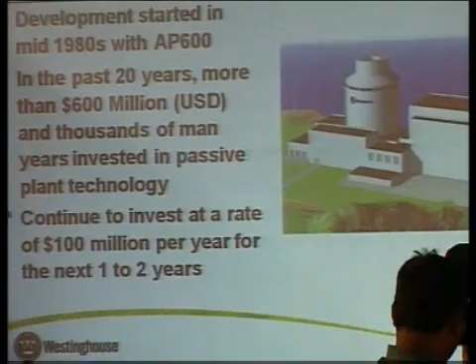Just a few comments on AP1000 technology. AP1000 has been in development for about 25 years. We started in the mid-1980s developing the AP600, predecessor to AP1000. About 600 megawatt plant. AP1000 actually is around 1,100 megawatt plant. But I credit the engineers and scientists with the foresight 25 years ago to look at passive technology. And it's to their credit that I think we are where we are today with the AP1000.

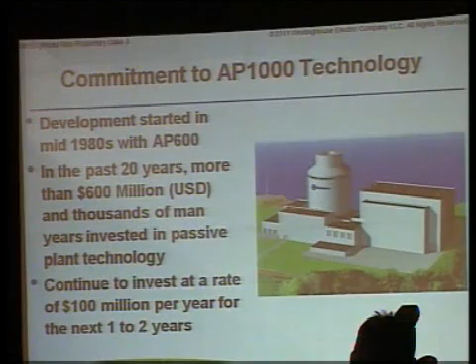Considerable investment, 25 years, and we often say that we've invested hundreds of millions of dollars to prove that gravity works, and it still works. Mr. Isaac Newton was correct, gravity does work, and we proved that, but it's taken hundreds of millions of dollars to prove that.

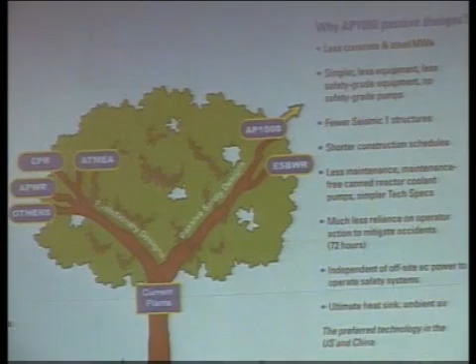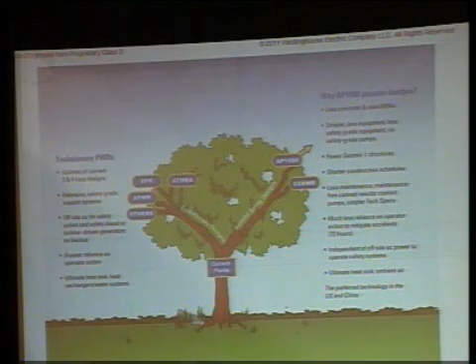As we look at the evolution of nuclear power, there's several different ways to achieve increased levels of safety. When we talk about safer plants, we typically talk about increased levels of safety. And if you look at this tree, there's two branches. One way to achieve those levels of safety is by adding active systems, more redundant systems, additional trains, additional pumps and valves. We can achieve those levels of safety and redundancy by adding those active systems. The other way, the right-hand branch, is the passive way. AP1000, General Electric's ESBWR, we heard about the advanced pressurized heavy water reactor and its passive features.

So that's the other branch of how we achieve those levels of safety. And we believe that passive is the right way because it's simpler, has fewer safety grade pieces of equipment, and less stress on the operator. And the ultimate heat sink is ambient air, the atmosphere.

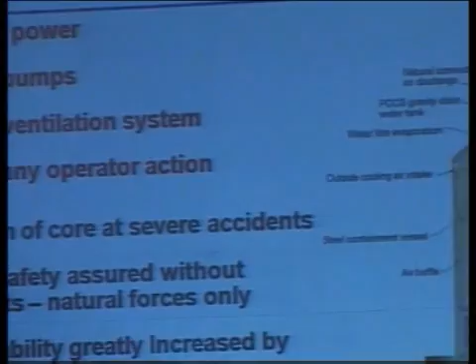So if we look at the AP1000, some of the key safety features, top of the list is no reliance on AC power. And if we look at the events at Fukushima in March of this year, not having to rely on AC power is a significant benefit for reactor design and safety systems. No safety-related pumps, so there are no pumps that need to activate in the event of a loss of power, station blackout. 72 hours without operator action, so there's much less stress on the operators in an emergency event.

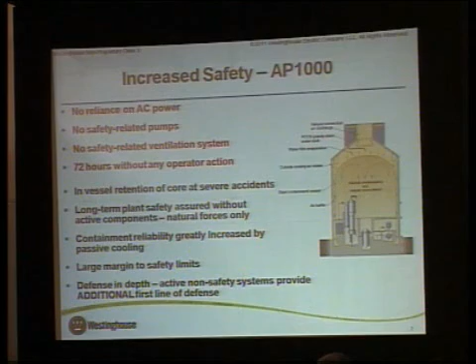Now, I must add that there are active systems in the AP1000 design. Those are non-safety-related active systems, and the operator has the ability to activate those active systems to mitigate the event. The passive systems only come into play if those non-safety related active systems are not available, such as in the instance of a station blackout. But the first line of defense is always to utilize the systems that are available to the operator. If those fail, the passive systems kick in.

In-vessel for severe accidents, we utilize in-vessel retention. I'm not going to talk about that today, but our system is to use in-vessel retention to prevent the escape of a core from the reactor vessel.

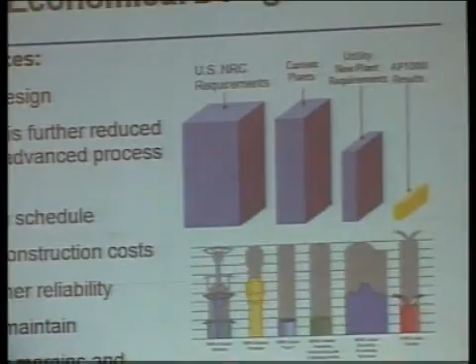So if we look at what passive safety features can drive, particularly the lower right-hand side, those compare the various quantities of material of a typical Generation 2 reactor to a passive system. Significantly fewer safety-related pumps, significantly fewer safety-related valves, significantly less cable, significantly less concrete, and particularly significantly less seismic building volume. The seismic building volume is a significant driver to construction time and construction cost.

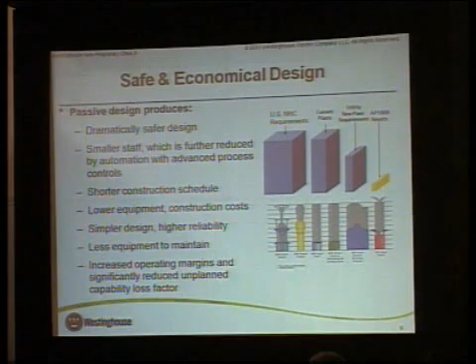As I mentioned before, looking at the last bullet, the operating margins, we have significantly increased operating margins. Accidents are mitigated through the use of active systems that are available, and the passive systems only come into play if and when those active systems are not available.

Again, we have a saying that size does matter. If we look at the picture on the left, we compare a traditional Generation 2 reactor. This happens to be Sizewell, which is a Westinghouse 4-loop plant in the United Kingdom. If we look at the footprint, the safety-related systems in color, and compare that to the footprint of an AP1000 on the right, you can see the significant difference.

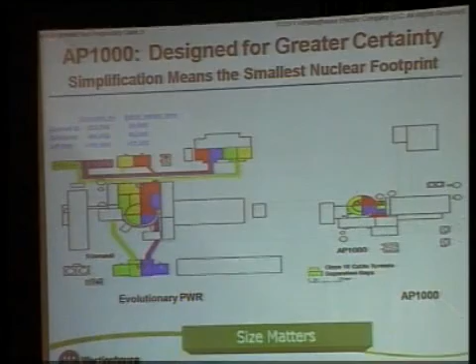When we have visitors come to our construction sites in China, they're amazed by the size - the smallness of the AP1000, the smallness of the footprint compared to a traditional, typical 4-loop or even 3-loop reactor.

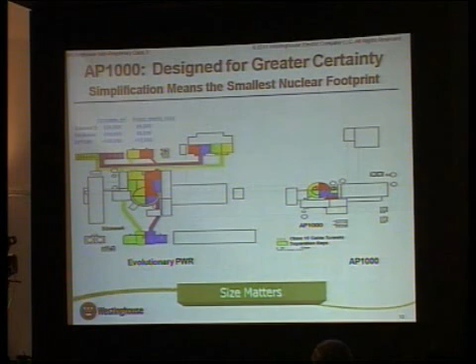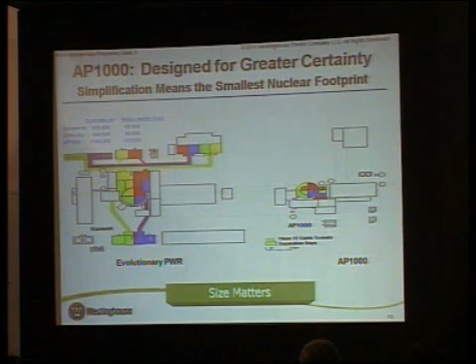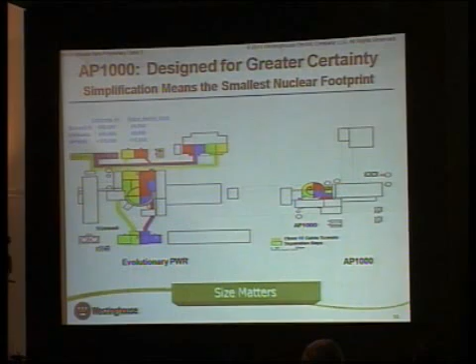So if we look at some statistics, an AP1000 compared to a Sizewell plant uses about a fifth of the concrete and about a fifth or a sixth of the reinforcement bar. Less concrete, less rebar means less cost, and even more significantly than less cost, means more schedule predictability and shorter schedule time. In nuclear, with very large capital costs, construction time is paramount, and the ability to control and assure construction time is paramount to keep the costs within reason.

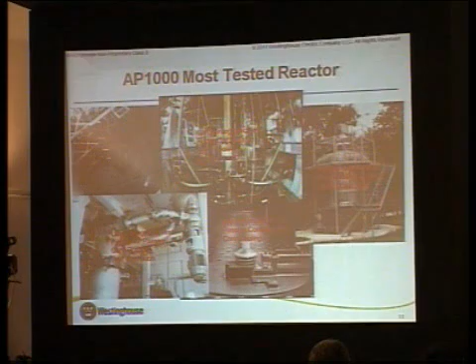I mentioned before testing. Since the mid-80s, the AP600 and the AP1000, the AP600 being the predecessor, has been extensively tested. These are just some of the pictures of the testing that we've done in the United States and around the world to prove the various passive systems work. Again, we proved that the gravity indeed does work through extensive testing.

A very current event, station blackout. Of course, what happened at Fukushima was a station blackout event. The AP1000, even starting 25 years ago, took that into consideration. So in the event of a station blackout, the reactor is maintained in a safe shutdown condition for 72 hours with absolutely no operator action, no on-site, no off-site AC power - no AC power is required whatsoever in the first 72 hours to maintain the reactor in a safe shutdown condition.

And after, from 72 hours to 7 days, we would use other sources of water on site, and after 7 days, additional sources of power and water would be implemented to maintain long-term safe conditions and cooling.

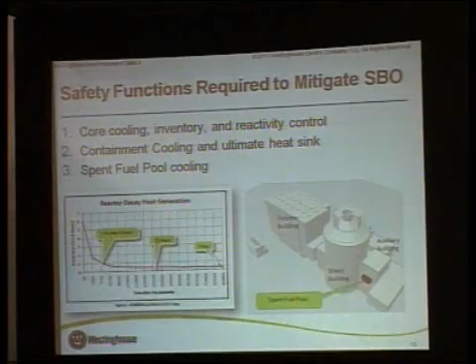Again, looking at station blackout, which is very relevant to today's safety environment, 3 things you need to do to mitigate a station blackout. One is core cooling - you need to cool the core. You need inventory to cool the core, and you need to control reactivity. The chart below just shows the decay heat, and it's particularly important to maintain that cooling in the early stages of the event because the decay heat is high and obviously tails off as time goes on.

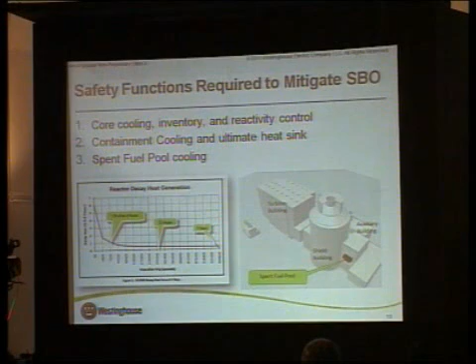The other thing is containment cooling. You have to get the heat out of containment to the ultimate heat sink, which in the case of the AP1000 is the atmosphere. And then lastly, spent fuel cooling. As we saw in Fukushima, you can't ignore the spent fuel pool - you must maintain cooling of the spent fuel pool at all times.

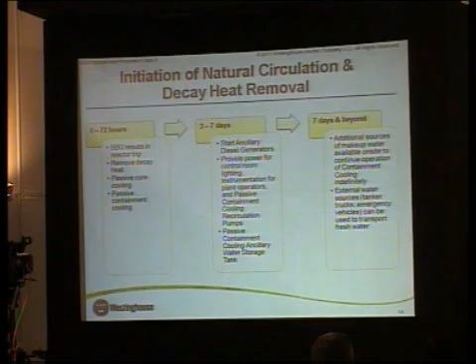So if we look at the scenario of the station blackout, 0 to 72 hours, you have a reactor trip because of station blackout. I have some animations coming up that will demonstrate some of these features, but you need to remove the decay heat, and we do that passively through the passive core cooling system. You have to remove the heat from the containment, so we do that through a passive containment cooling system. 3 to 7 days, we have ancillary diesel generators, non-safety diesel generators on site that we would activate.

To provide additional sources of water, such as to fill the water tank at the top of the AP1000 containment - I'll explain that a little bit in a few minutes. And then beyond 7 days, we would have additional sources of water that we can bring into the site to provide long-term cooling for the containment, because if the containment cooling system continues without the addition of water, the other water is needed to actually cool the containment for the ultimate heat sink.

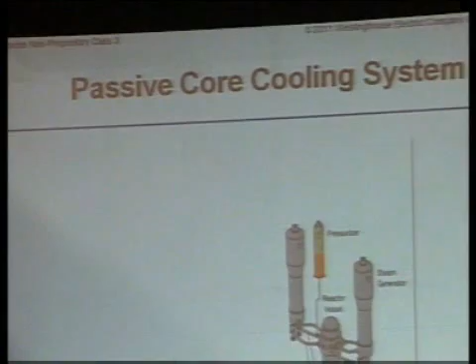So I'm going to, hopefully these will work. This is actually a demonstration of a LOCA. It's similar for a station blackout. You have a break in the primary system. The pressurizer responds to that break by trying to make up water as the system is losing it.